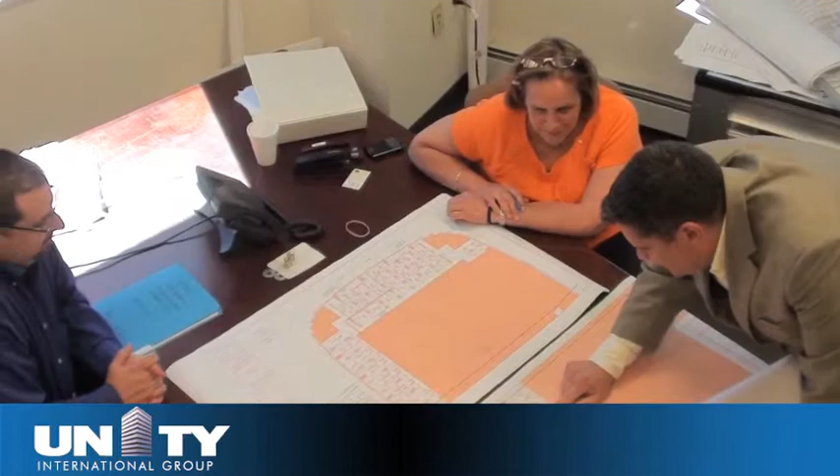Unity International was established in New York City in 1947, and since then has established a reputation as a single-source global leader for Fortune 500 clientele, such as Citibank, Con Ed, JetBlue, JP Morgan Chase, New York Times, Sony, and many, many more. Unity's services include structured cabling, IT solutions, critical system installations, electrical services, electrical system maintenance, and monitoring.

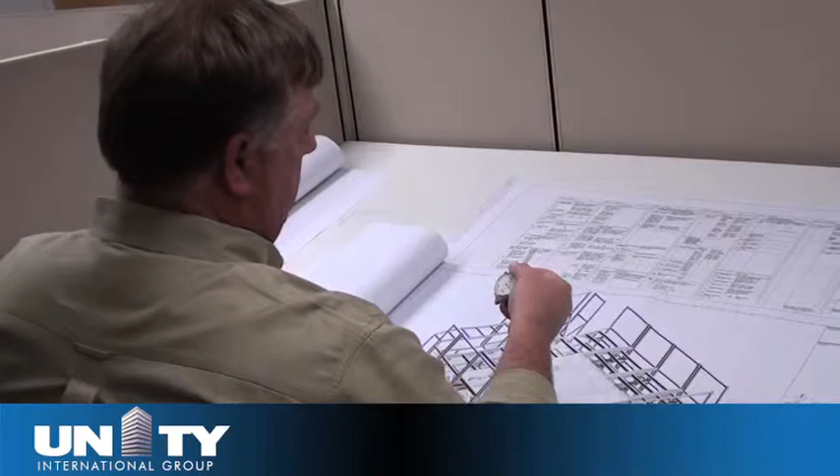Unity specializes in new construction and interior building rehabilitation, structured cabling, trading floor fit-outs, back office support, data centers, office fit-outs, general power, life safety, security systems, and fire alarm systems. Unity's focus is to deliver mission-critical systems and services on time and within budget.

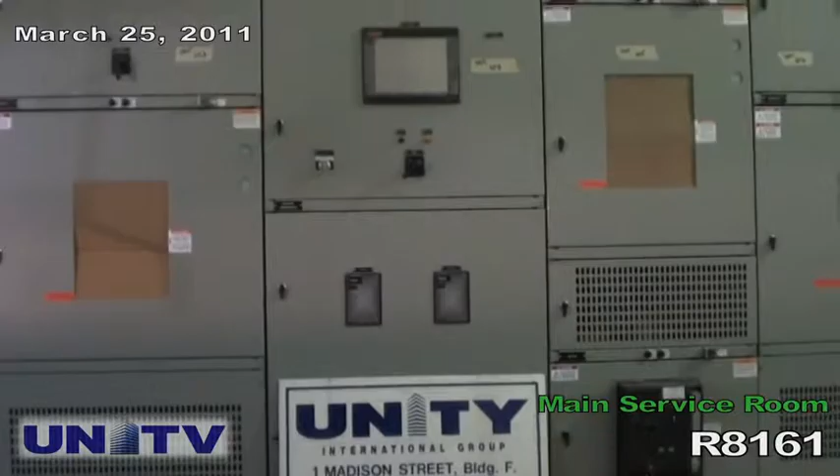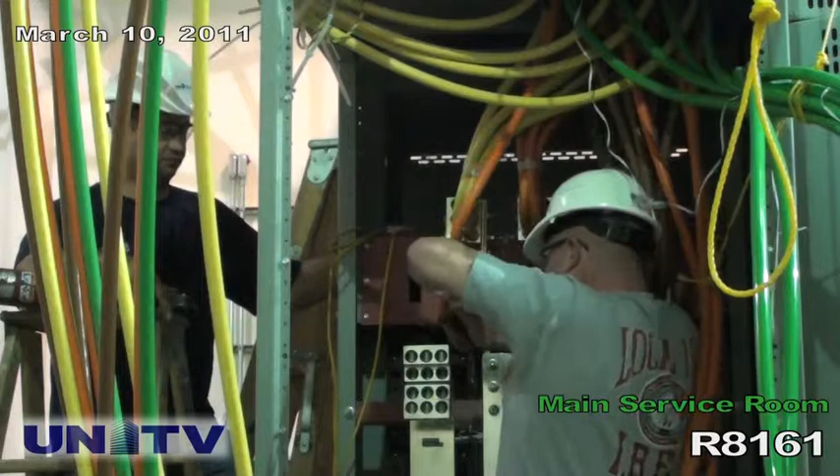These guys are working on pipes for the site scan, which monitors the status of the breakers. So they can record open breakers or tripped breakers, and it reports back to the building what's going on with the breakers. These guys are shaping in one of the ATSs, and the ATS is a piece of equipment that takes normal power and emergency power and swings it back and forth to the load.

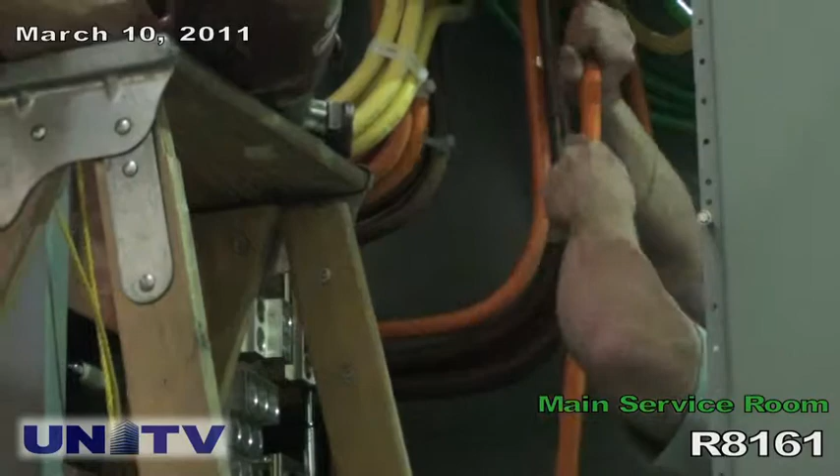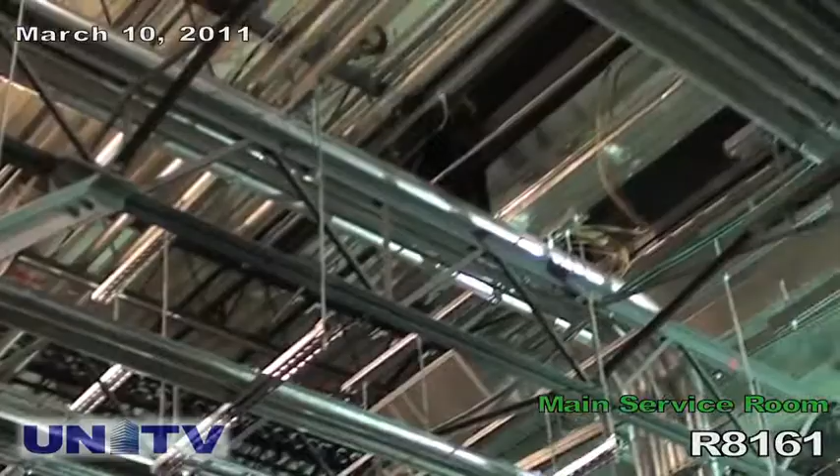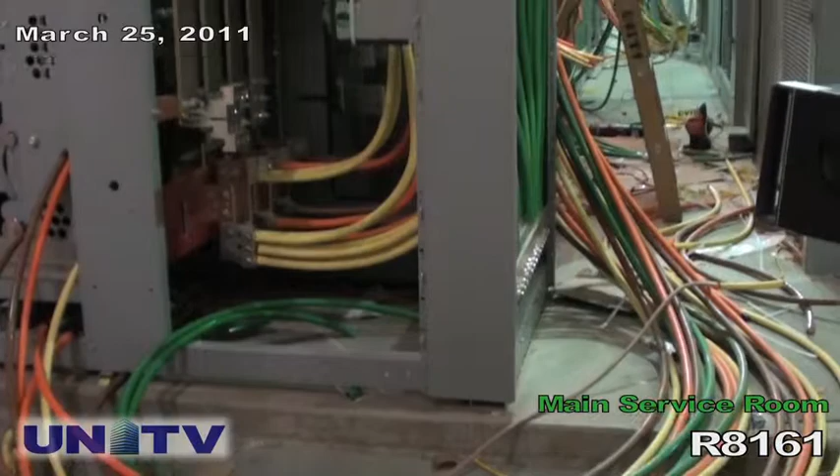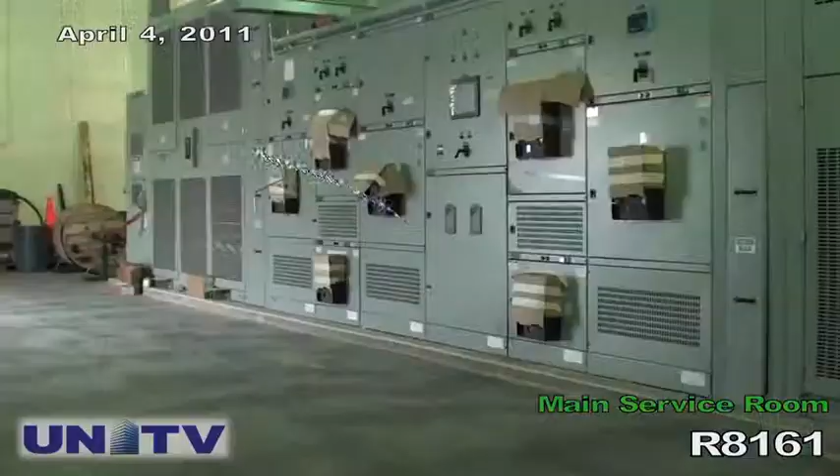What you're looking at here is a switchboard. It's 480 volt, 3-phase, and the distribution panels. Here is your service coming in. It's a 13.2. You have the ability of bringing redundant feeds in, and in the middle is a tiebreaker, which gives you the availability of using one service or the other in case there's a power failure. That's your 13.2 disconnect.

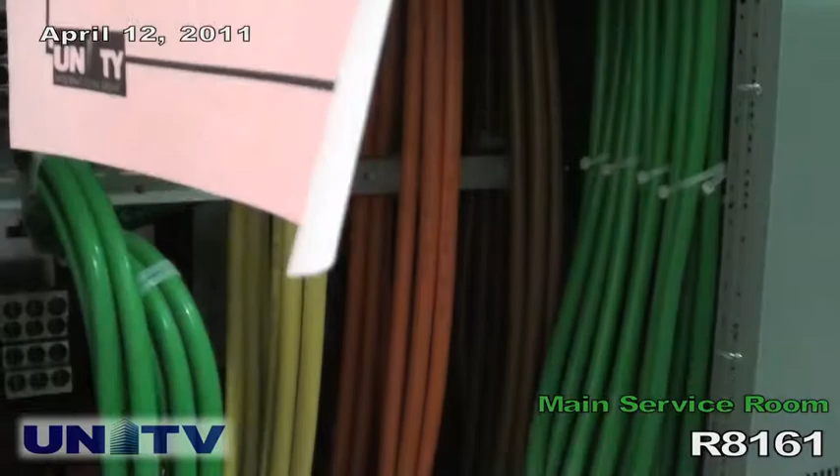This is a trace. They test all the breakers, they measure all the cables, and they give us a report to let us know that everything works okay, and they make a complete report for us. This is your gear being live, and the ATSs, switchboards, breakers are racked in.

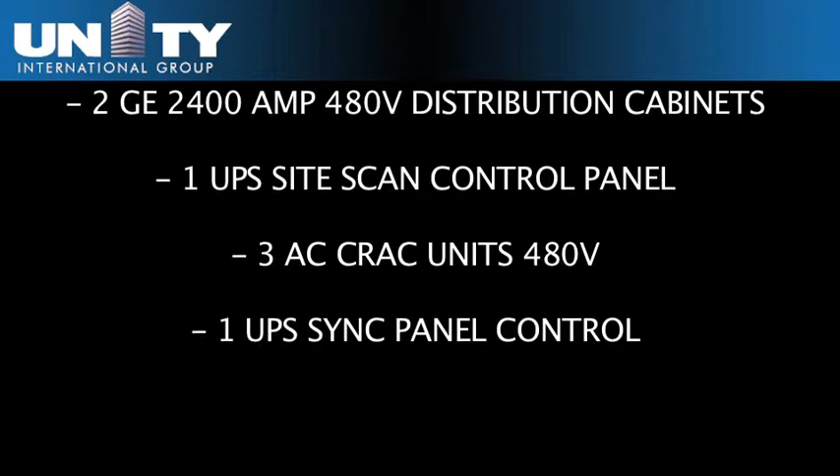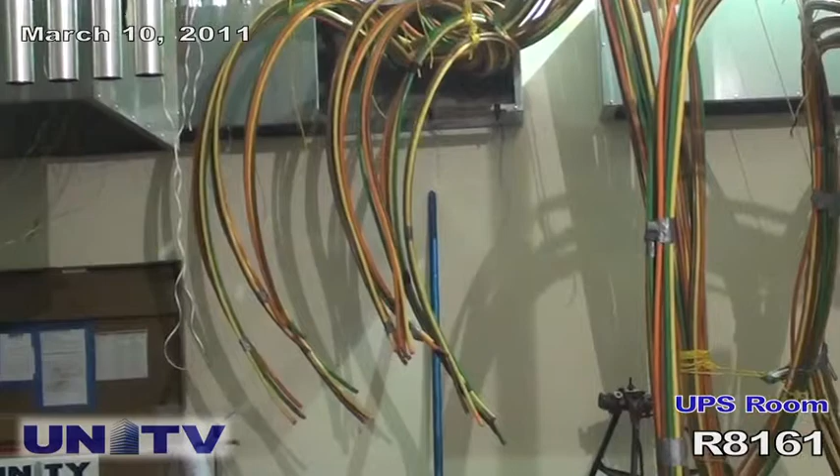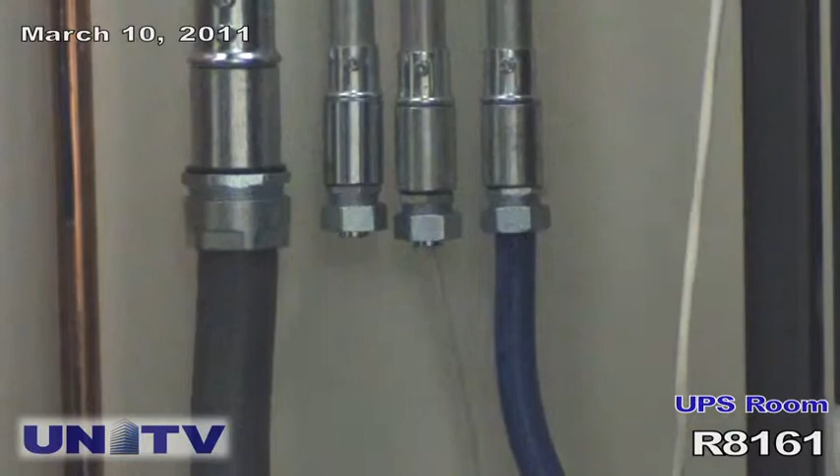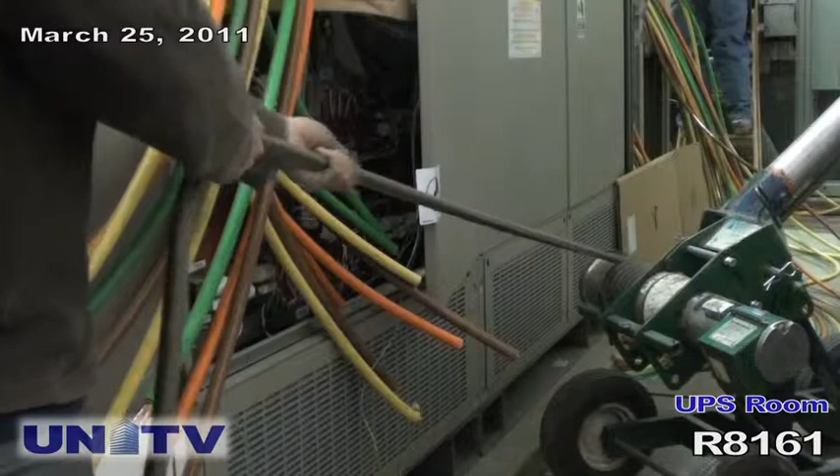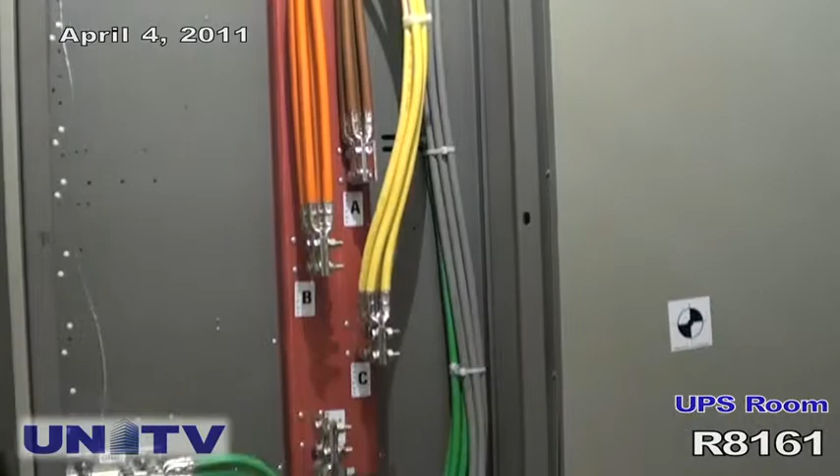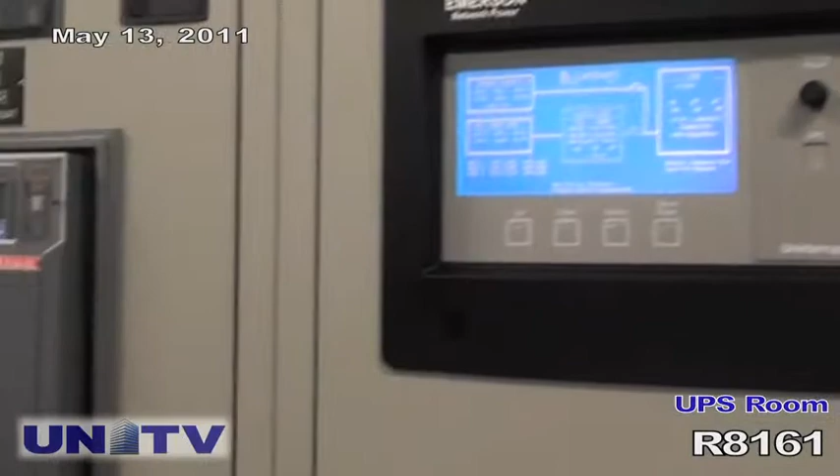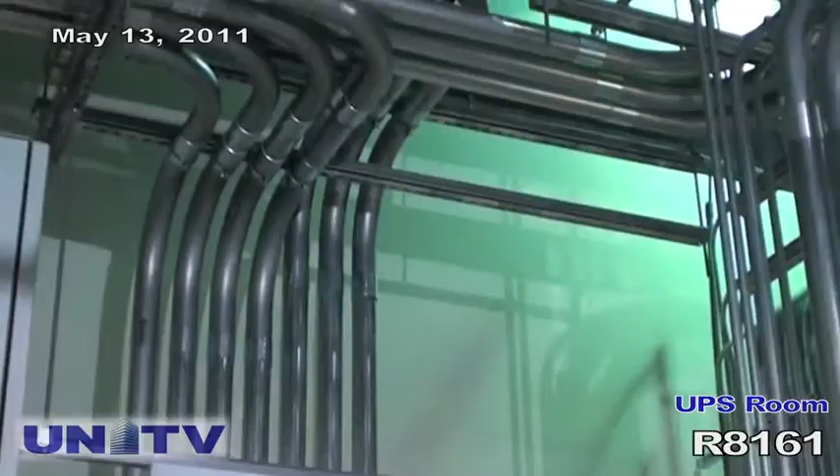Okay, that's a UPS. This is wire that's being pulled, hasn't been terminated yet. Here's our lockout, tag out. We lock out, tag out breakers. That way nobody can come in and turn something on in case somebody's working in a piece of gear. These are all the different pipe runs that come in and out of the UPS.

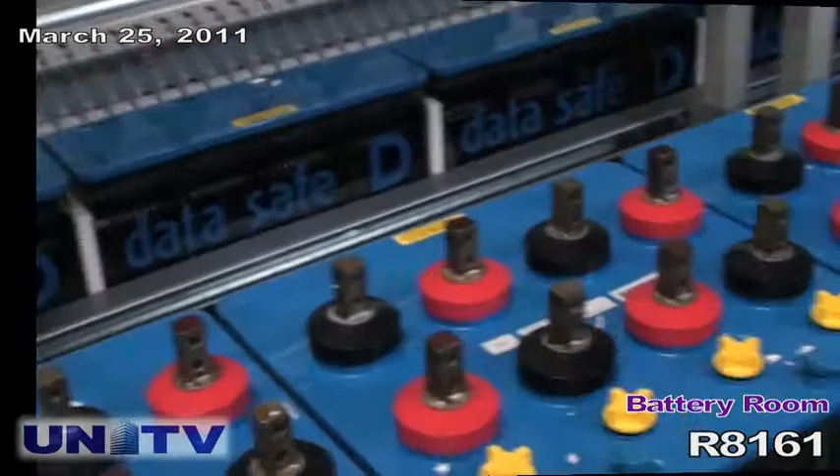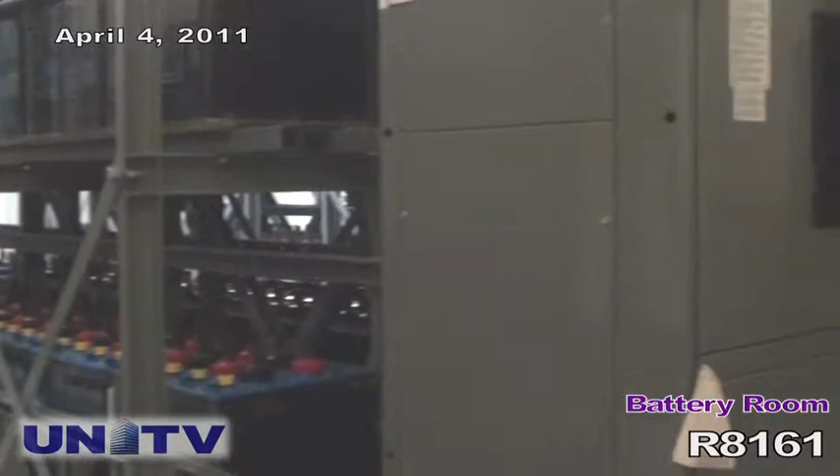We load all the battery racks ourselves. We put in Panduit for the B-Tech monitoring system. Each battery rack has a disconnect. There's your DC cables coming in.

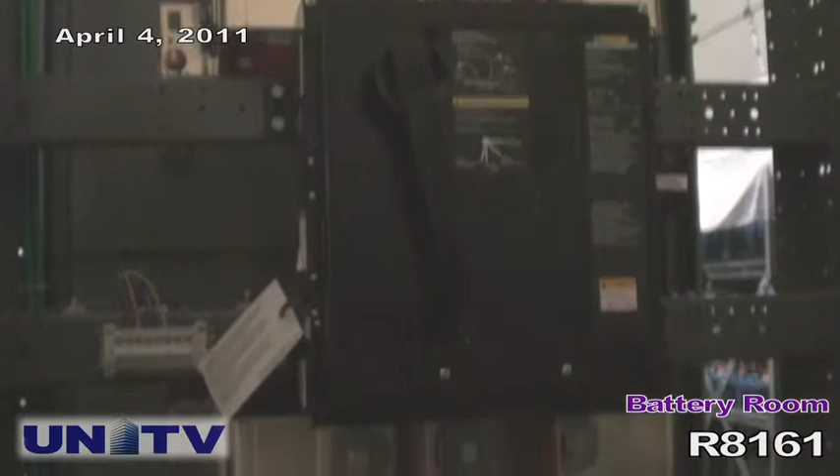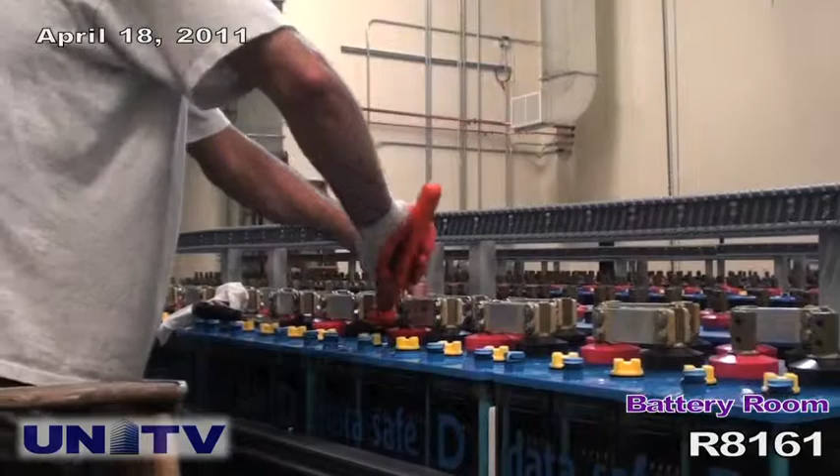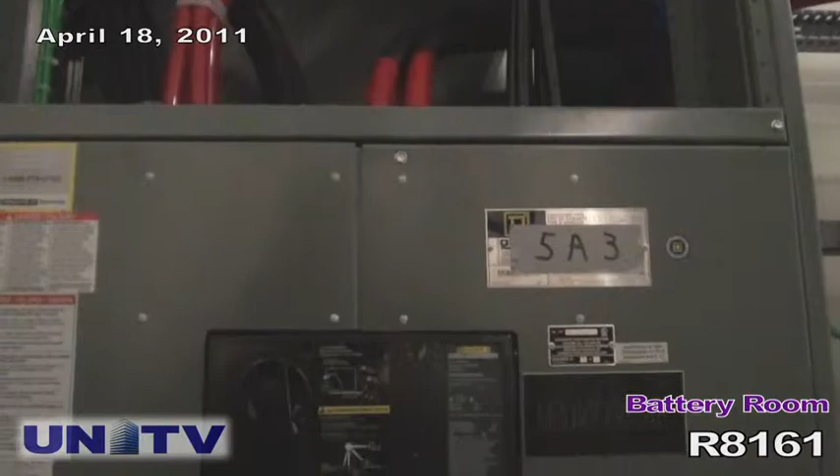We dip all the plates for the batteries. We put jumpers in. We ground all the racks. We have a torque setting for all the plates that are checked by startup, to make sure that everything's torqued to a certain amount. See the B-Tech monitoring system on the side of the racks. That tells you just about everything with each cell, from if it's working properly to temperature.

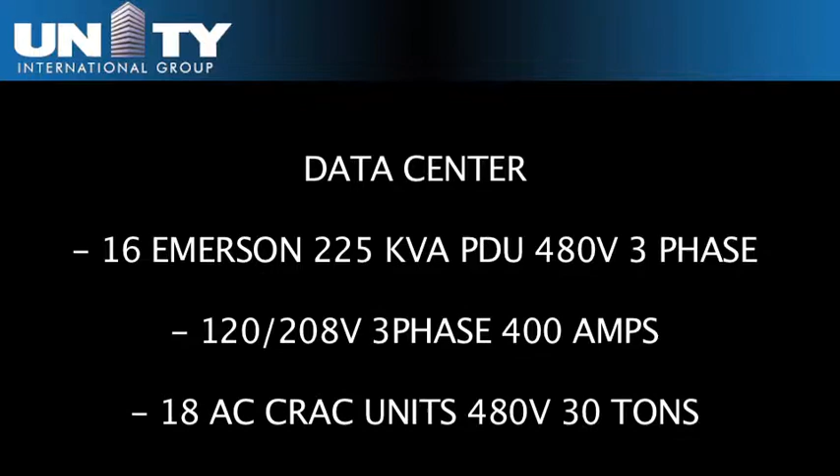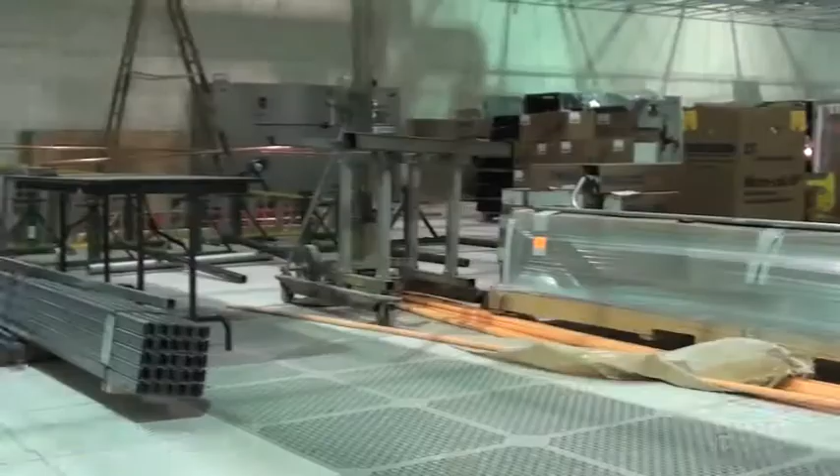This is a data center under construction. Those are CRAC units there. These are the PDU feeds. Ceiling grid's up, ladder racks in, lighting's in. There's grounding associated with the ladder rack. We also install Panduit in the ladder rack.

That's 3-tier ladder rack. We have the smoke heads in the ceiling. We have motion sensors now to control the lighting in the data center. That's something they added this phase. Grounding's in, fire alarm's in, lighting's done, security cameras are in.

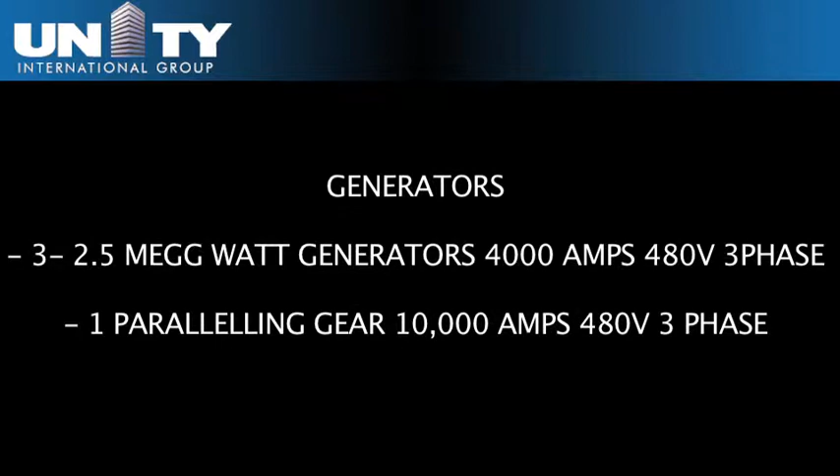Here we always set the generators. Each one has ten 4-inch conduits, 480 volt.